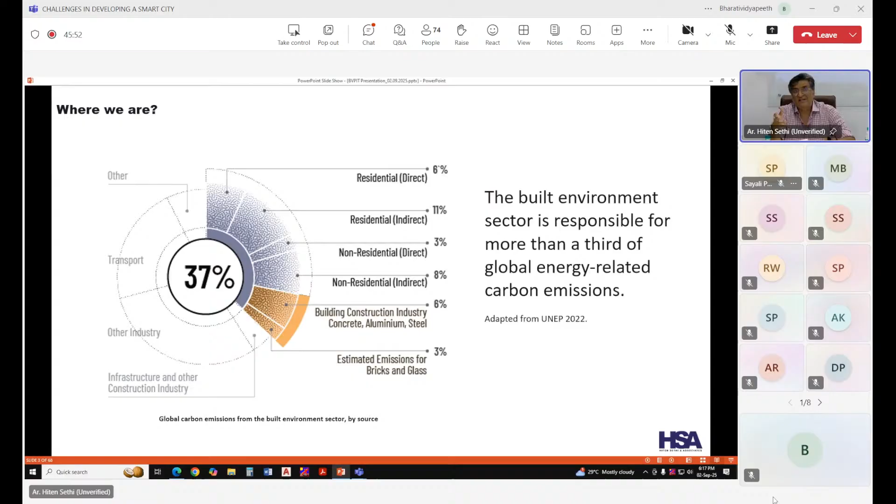Now, where are we heading with these kind of developments—I'll give you some very interesting figures. Urban development is set to triple in the first three decades of the century, the largest cityscape expansion in human history. By 2030, 6 out of every 10 people will live in the city.

This sprawl will swallow up a landmass nearly equivalent to the size of South Africa. The majority of predicted urban growth, 55%, is expected to occur in our own continent, Asia, including a 1800 kilometer east coast urban corridor in China plus 7 state capitals throughout India.

What is going to happen is it's going to consume biodiversity hotspots, leading to extinction of 139 amphibian, 41 mammalian, and 25 critically endangered bird species. And as we speak now, there must be at least a 10% decrease in these endangered species, because the data which I collected was way back from 2020.

By 2030, we'll need to produce 50% more food, energy, together with 30% more fresh water. When you see these figures, what you gather is the claustrophobic expansion which is going on. Anything we do today to mitigate these collateral damages is less—it's not going to be enough to get things to the right levels.

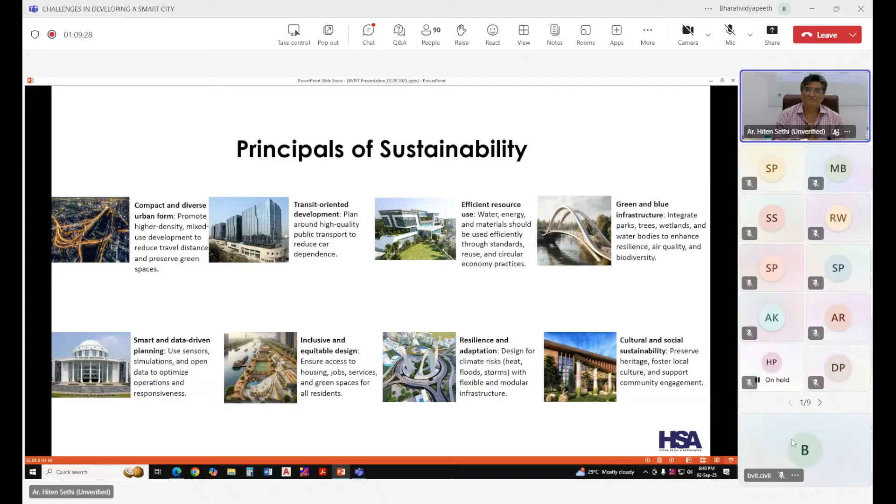What changed? From aesthetics, it became about how beautifully your building performs. So from looks and space planning, it became the performance of the built form. These two are two absolutely different partners going hand in hand nowadays.

You still need a very efficient building. We're talking about efficiency of buildings in residential, commercial, and all those things. We like beautiful buildings - see it in New Bombay, go to Hyderabad, go to Gurgaon, you see excellent kinds of construction coming up. Though at times they feel more European or westernized than Indian, they're aesthetically beautiful.

But a new trend started 15-20 years back when people realized that this is not the only thing - that I'm being very irresponsible to my neighborhood in terms of climate and use of my building. I'm not saving water, I'm not recycling water. The whole concept changed - let the building be called beautiful by its performance.

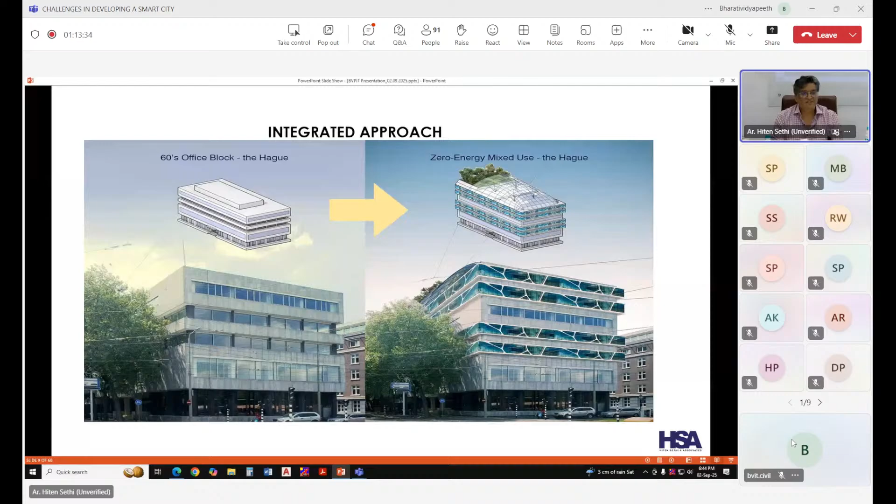So this is what happens now - everybody's talking to everybody. It's not about a building as a standalone building, it's about every concept of engineering coming together to make your building stand out in the field of sustainability. This is my future.

This is where I say my building becomes net positive. I'm not taking away from Mother Nature, I'm not taking away from the infrastructure corporation - I'm giving back to the corporation. Our IGBC headquarters, made about two decades back, was net zero at that time. Paryavaran Bhawan and Environment building in Delhi is net positive. They talk about solar covering, and how it encompasses the whole built form to achieve these things.

Your glass facades with lots of shades give you the same effect as cutting down glare and excess heat if used properly. Your ventilation still plays a very important role - cross ventilation in any kind of space. You have technology to back up your designs.

Your openable windows can be just adequately opened rather than spoiling the complete efficiency of air conditioning, in case the whole building is air conditioned now. Your storage tanks - chilled water storage or hot water storage - can be used, like in hospitality, using hot water recycled towards toilets and baths nowadays.

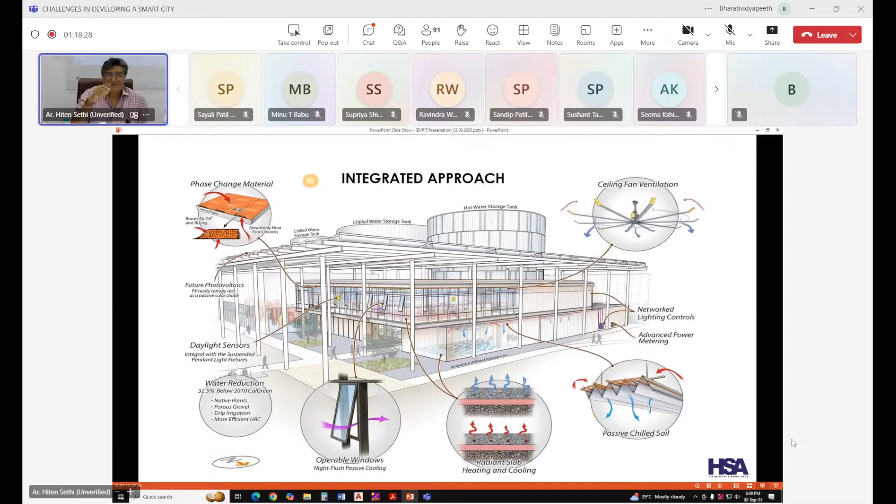So developments kept on happening. We started coming to prefabricated modular construction. There was flexibility, dynamic spaces, and so much of advancements happening. You keep on understanding how much buildings can go faster.

I remember recently we did for CIDCO a Pradhan Mantri Awas Yojana. We were the PMCs for that project, and we were able to do a ground plus 12 building in 96 days. Those are the kind of things which helped me to put technology first. So that means we went for precast, we went for zero wastage kind of policy while working.

So it was more of planning and less of execution, and that's where the world is going. Recently, about 4 months back, we did a ground plus 6 structure for CIDCO again, and that was done in 45 days, again precast. But these are post plinth, like after you come above the plinth. So those are the kind of new things which are focusing more on efficiency and flexibility. Adaptability and flexibility, I say, is the new keyword for the next generations to come.

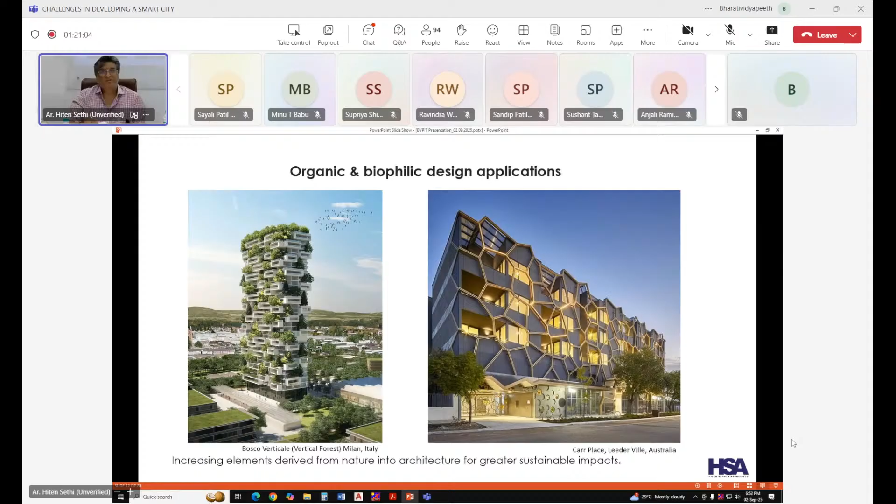Small elements, you see architects from time to time have been using. One is very simple: your step terraces in New Mumbai as earlier used to have it. All these step terraces were saleable, so for builders it was good, they used to sell them. But what did it indirectly do? It used to give you a space for having your plantations, greenery.

It gave you a space which acted as sun breakers to your windows, which increased the efficiencies and cut the glare for the inside light quality within the spaces. It also now gives you a lot of vertical spaces to have even solar roll-on panels which can be used for individual flats. So you don't wait for someone else to come and do it for you. This is your house, you can do it for yourself.

Many new design concepts came in where new swimming pools were introduced. We're doing one project in Rajkot on a similar thing - recycled water being used again and again. The idea of swimming pool was leisure, but when we worked on the water balance of the whole building, we realized we could use this additional water instead of throwing it to our drains. I didn't have space at ground level for a large pond or enough rainwater harvesting capacity, but we created swimming pools at every floor.

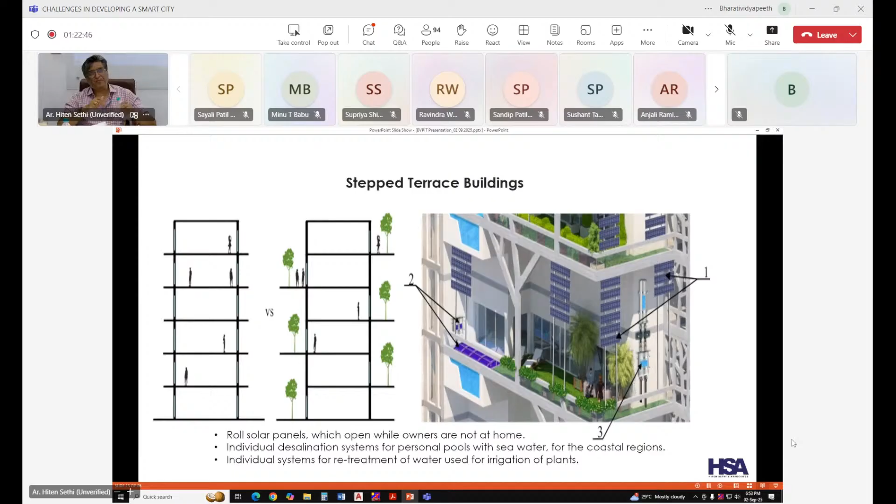Then the roof gardens, like the Jade Garden at Worli Science Center - that was initially constructed in the 80s by Mr. Kadri, and that was the first time we saw a terrace garden at such a huge institutional site, and that also in a place like Bombay. So many things started, and built forms started looking at that particular thing.

Each and every element started asking for inputs from visualizers to be a responsible part of the built environment. So whatever we do now in roofs or gardens or other things, it comes with a purpose and a very robust concept, well integrated into the whole complex.

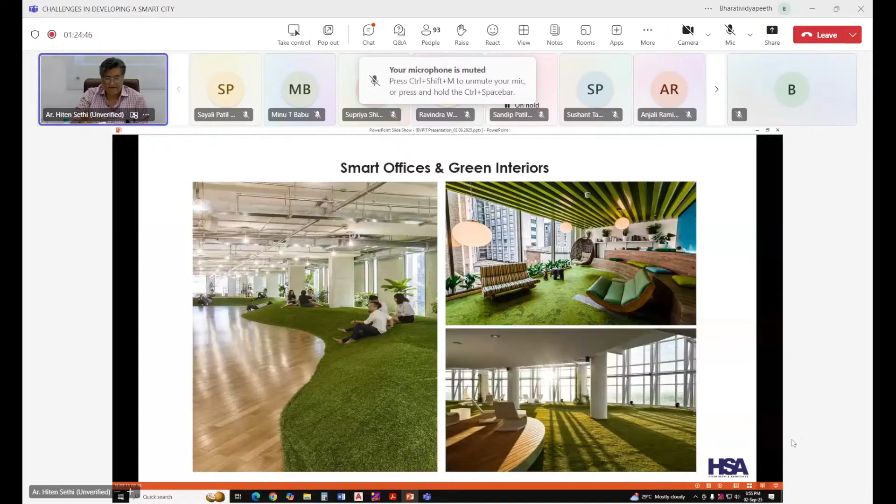These are what the future is bringing us together - offices are bringing nature inside, there are lots of leisure spaces, many informal spaces which you see in a lot of IT companies integrating. Anything which stimulates the human senses, which stimulates the whole working environment - I think that's where the main focus is of everybody. Those are the kind of things which can move us in the right direction.

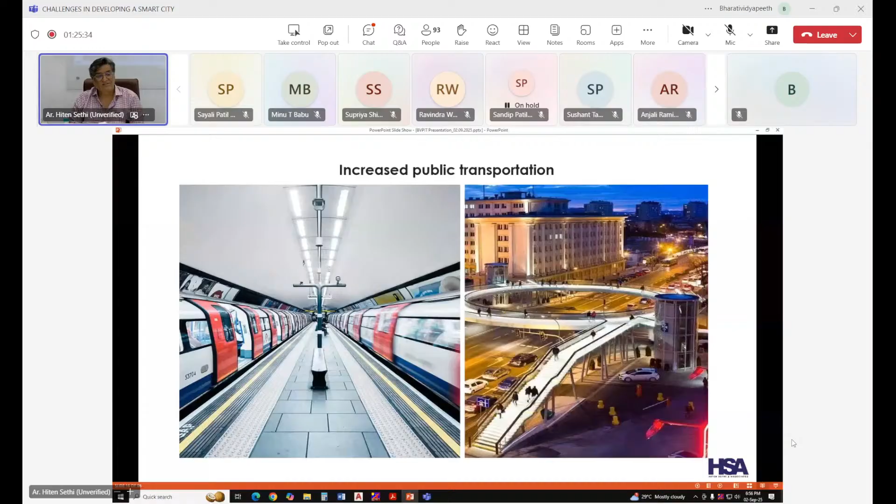Public transport - you cannot have cars everywhere, or you lose out on walking space, breathing space, and your space. You can't lose these three factors at any given time. So the best solution is a robust, increased public transportation system. London has tubes, we started a metro. Unfortunately, our population increase is comparatively much higher than the infrastructure being introduced in public forums, so it gets absorbed so early that it's not noticeable. But yeah, we're doing a good job.

I think the infrastructure over time has been fantastically integrated into our brownfield cities, but enough is less given the population growth we have. The only thing I see is that we really need increased public transportation, more built forms, and more government-level interventions to give these facilities to people, so people get their own space in the city.

Again, sustainable designs - many concepts are happening, like bamboo nest towers which are going to be ready by 2050. It was a concept where designers wanted to create a sustainable environment - tunnels created with energy generators, wind tunnels created at different levels, complete bamboo roofing. The architect wanted it to be like a forest, the vertical city to be part of a forest, so he covered the whole thing with the bamboo nest, and biophilic design follows at different levels and places. It traps wind energy through these wind tunnels, keeping the whole environment workable and usable, and actually invites more birds and habitats to be part of this built environment.

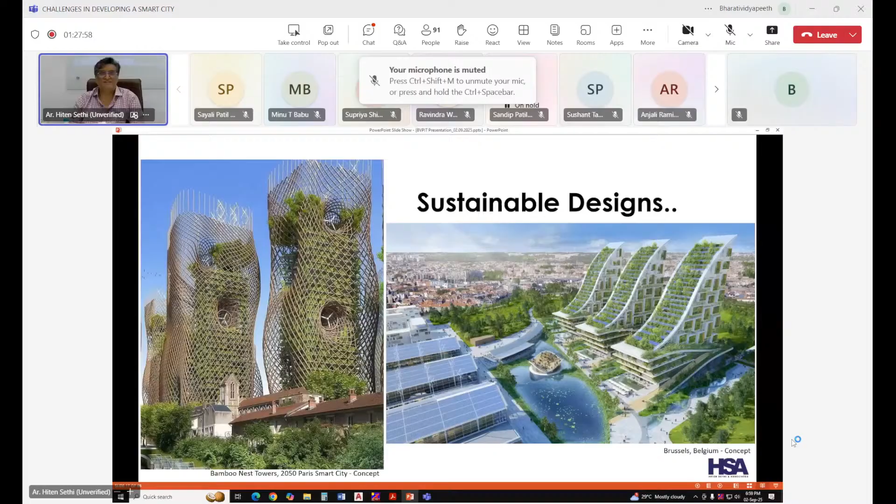So different kinds of concepts worldwide - people are experimenting and putting things, doing their part of the job.

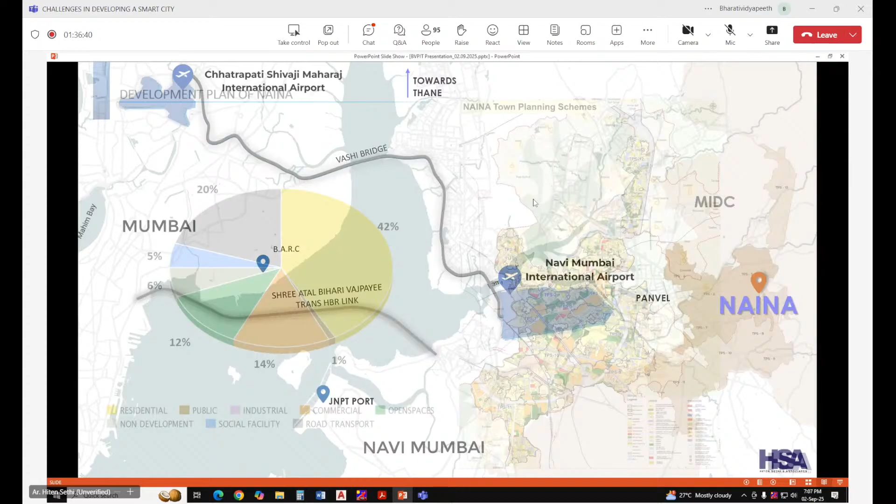So it has a very interesting DP sheet, and by looks of it, it looks like a Rangoli diagram, as I always say - yellow, green, orange. When we read the GDCR, we used to find it funny what the spaces are, what is growth sector, and what are these things. But we realized there was a logic when the plan was made - it had 42% of residential area.

A very robust transportation system, 20% was already allotted. Then commercial space at 14%, non-development which had rivers and unworkable mountains, hill slopes, were there at 6%, which is very high. Green spaces we left at 12%. So we knew that 12%, 6, by 18% we're going to have it open, and then for 20% I'm giving a road anyway, so it's going to be 38% open spaces. This was like public and industrial - so there's no industrial here, so public and social facilities put together.

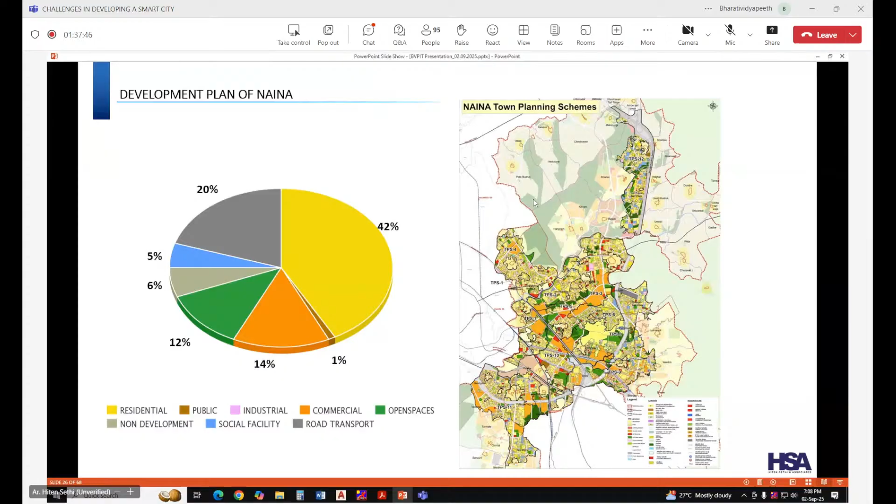So what were the objectives which we thought will make it future ready, which will serve our next generations to come? We've seen the development of Mumbai from 1971 to 2025. We're talking about something starting in 2025, and I'm sure it will go for another 50 years, so we're talking about 2075. So what are the basic principles we integrated?

We did some tweaking in the whole DP, where the focus was very clear that we wanted to give future-proof planning. We also wanted, with the kind of surge of tech and everything happening, to facilitate speedy development of economy so that before they go to Hyderabad or Bangalore or Delhi or Pune, they should first come to New Bombay. That's the kind of readiness we require in terms of infrastructure and sustainable ecosystem. And as I was talking earlier about inclusiveness, you need to create an environment which boosts mental, physical, and social well-being of the users and citizens.

So we had a very simple strategy - we wanted to assess the present and future demand, assess the feasibility of resources and proposed development. Very simply, when the project was conceived, as per the GDCRs at that time, the FSI was 1. Today, in 2025, the adjoining area half a kilometer away, under UDCPR, is giving FSI from 4 to 9. So what should be my readiness for this project? The whole concept goes for a toss. So we thought, let's assess what is designed presently and what can be the future demand, then create an incremental roadmap.

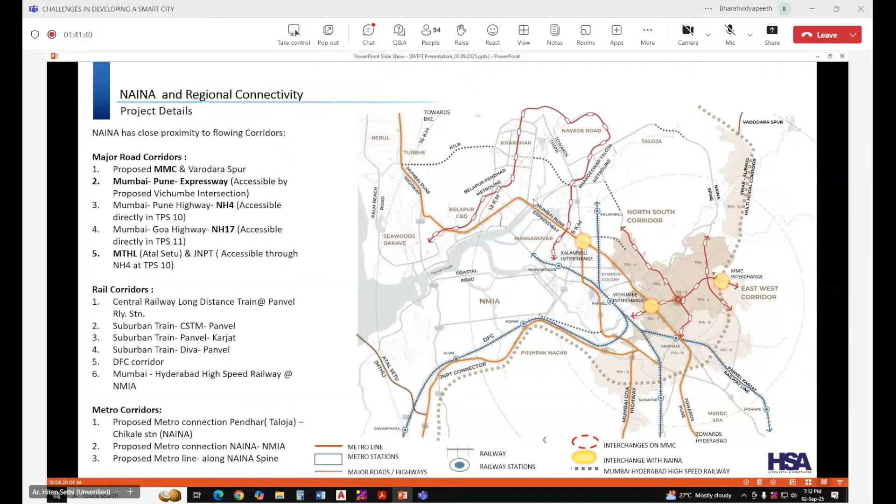We have multimodal corridors from 100 meters coming in, dedicated freight corridors coming in, JNPT connectors, airports - so many dynamic spaces in and around. How do you put this together so that I can reach everywhere in 15 minutes?

So what other things can we add to make the city more robust and more acceptable to people with different strategies.

Make iconic landmarks in terms of urban form. Choose those urban forms which become the city centers of that particular project - they should not be on the side of the road, they should be the focal point of the road. So give better space for living where the city gets its identity and branding.

Every TPS can have its own identity, it can have its own existence. Natural resources which are available can be taken as an opportunity to create a full leisure recreational space for people, like in Paris - next to the river you can have promenades developed. We had an opportunity of doing the same thing in Gadhi River.

Similarly, to be resilient and accommodate more population in coming time, do thorough flood mitigation measures right now - assess what effects population growth is going to have, and activate strategies to redefine the river fronts in terms of depth and quantity of discharge or water they'll carry in the future, because finally the whole city's stormwater merges into these endpoints, back to the creek, back to the ocean.

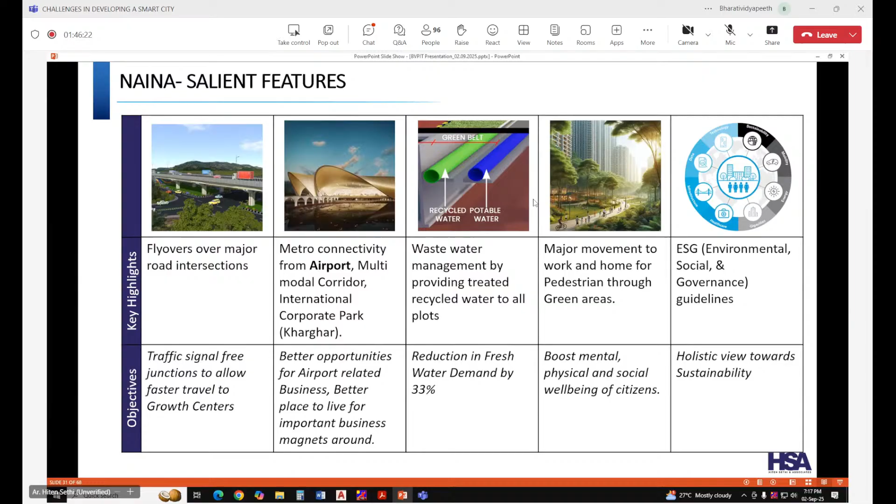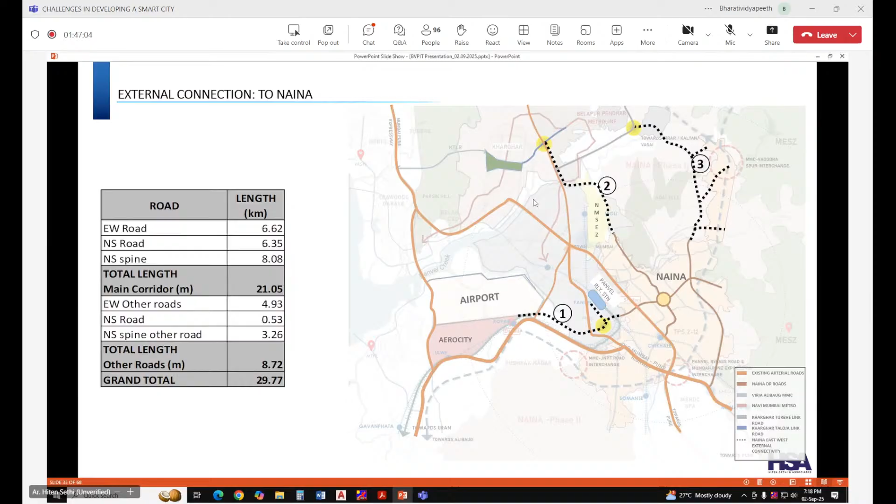This helped me define that from MIDC Mahape area, my travel time to this particular area reduces from 50 minutes to 18 minutes. From Belapur, it reduced from 28 to 13 minutes. Taloja MIDC from 26 minutes to 15 minutes, MTHL from 35 minutes to 17 minutes, and Rasayani Padalganga to 20 minutes. So imagine the whole city becomes 15 minutes connected. Don't you think that itself is a big feature which would improve development and talk about sustainability in the loudest of words?

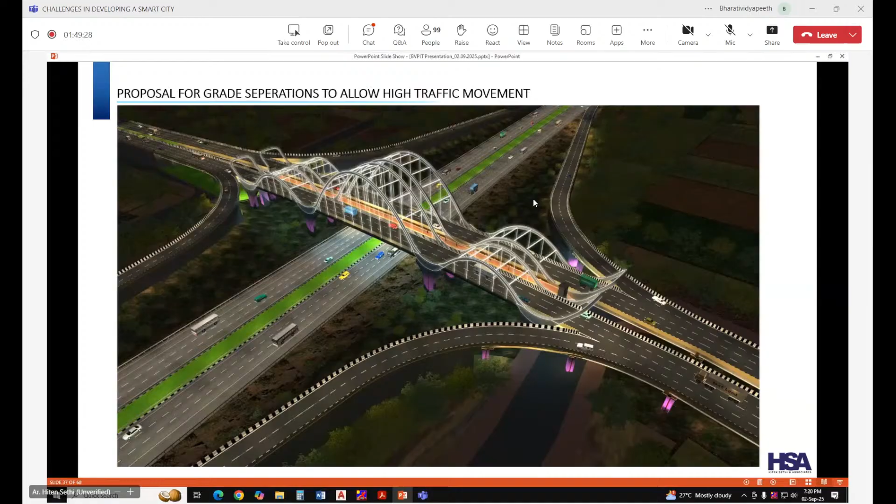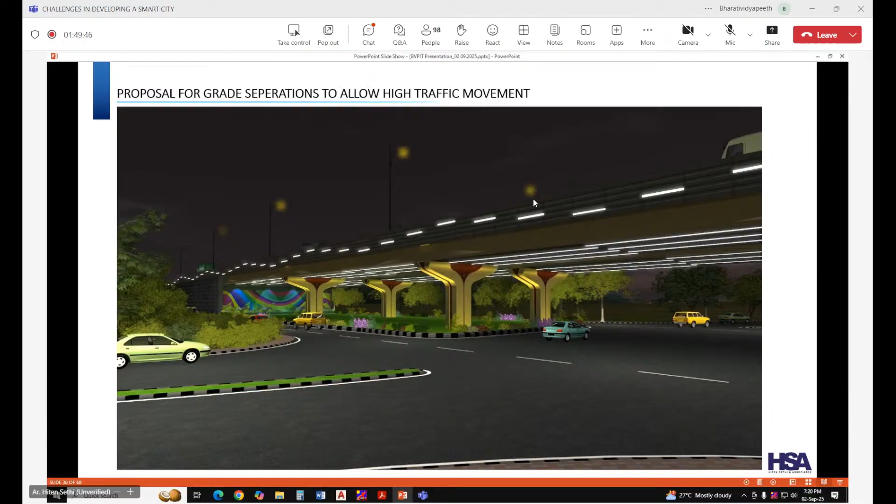The grade separations for people movement involve social cultural interventions where all the negative spaces or white spaces which get created here get used in some way or the other. Over the Gadhi River, you have these kinds of structures going in, so how you can make it more interesting - that's the kind of interventions we're designing right now.

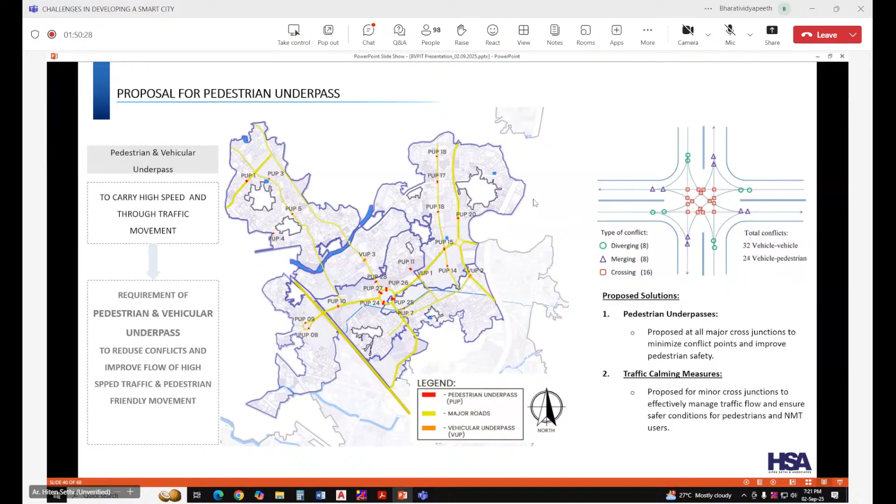As I told you, we have created lots of pedestrian underpasses. So at any given time, if my child has to go from school to home, he doesn't have to cross through this - we've created pedestrian underpasses. We've also created some junctions we call traffic calming measures at the upper grade level, where minor cross junctions effectively manage traffic flow and ensure safe conditions where we're not able to cross it over. Lots of underpasses like this again become social places for people to move in.

For road junctions, we graded the levels of the particular roads - service roads and main highways - for safety. We've used the sections for services together, and as you see, the main roads don't have walkways. The walkways and footpaths are on the service roads, which cater to the residential areas. So there's a free pass of vehicles on the main spinal roads.

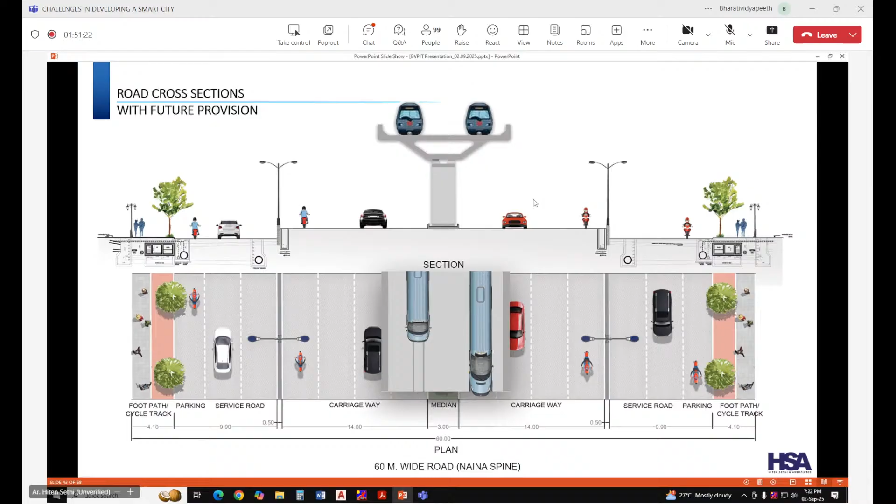Future provisions we kept right now, so that whenever the metro has to come, things don't go for a toss. We've kept medians in such a way that traffic is not affected the way it is now, because no services get affected. It's just that you barricade one side and start precasting in the coming time to accommodate future needs.

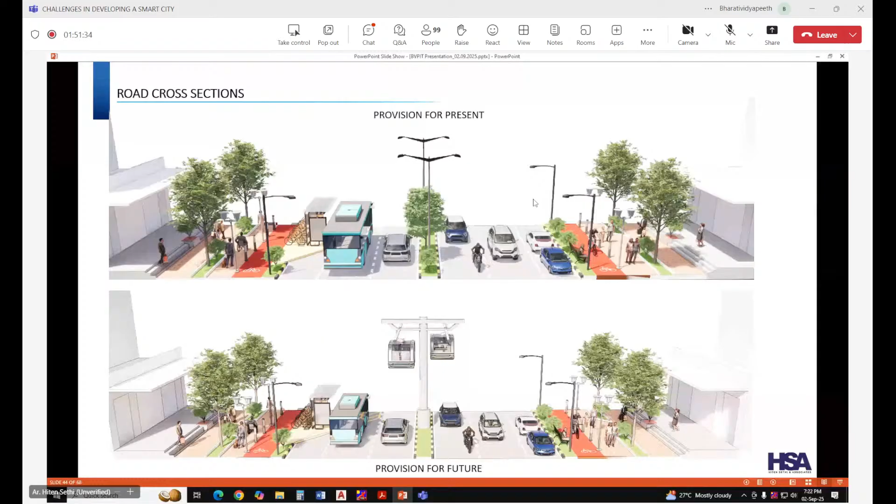Couple of sketches. Air buses which we've created, junction points, all the typical details, urban design of each and everything that the city is merged into a very interesting kind of detailing, which moves from one thing to another.

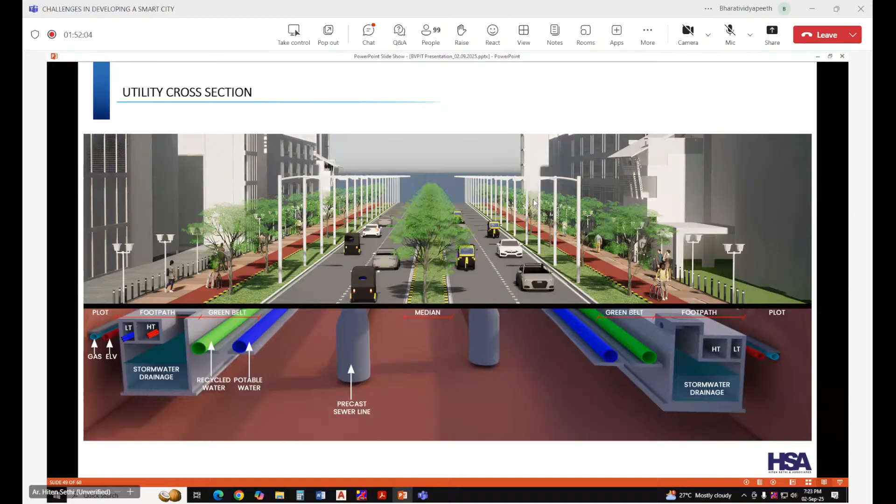I go to urban and we worked out utility cross sections next. So this is how we have created the city level now. These are all precast stormwater drains. So effectively, I'll tell you a very interesting thing.

Like we had the Gadhi River, which is very good for now, but 30 years from now, we didn't know that the capacity needs to be increased perhaps for all the water bodies which are available. So what we did was we took a technology which we were...

working with all the LT and HT. Generally, what you see there, they're very separately put services. So we integrated the whole thing in a particular way that we were able to save 40% of space and reduce 2 meters of height depth of excavation with this kind of tech. So the cascading effect is that your excavation at one point is reduced, less concrete and less materials are used for the same kind of construction.

When it goes to the river, the final river, there is minimum intervention required at Mother Earth's level where you have to change the course or increase the depths to beyond 4 meters or something. So we were able to do it in 1.5 meters only, and so on and so forth.

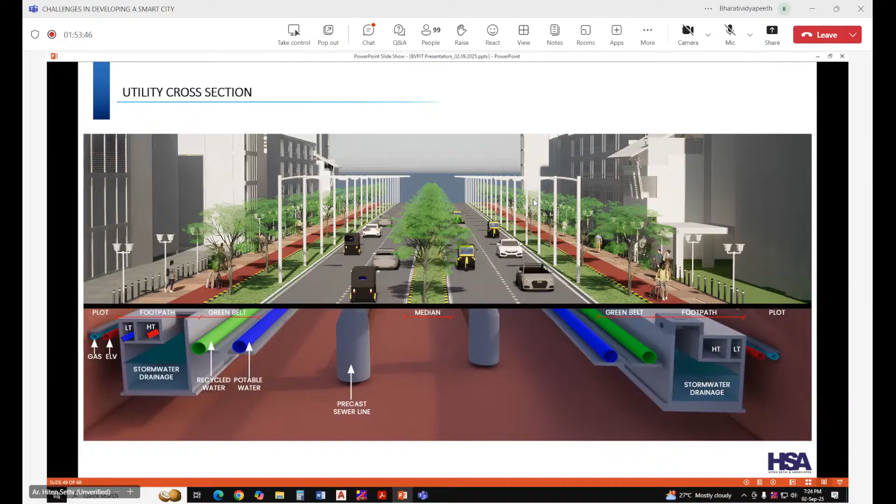So these kind of things have a very huge effect on literally every part of a particular city because water levels are fixed. We have blue lines and red lines, we are predefined. So we know when the flood risk is, we should not have another 26/7 like what happened there during flooding time. The same thing can be avoided by using smarter technology in and around. Next.

So that's the kind of sections which we created. And now each and every detail I'm showing you is part of my sustainable interventions when we are designing a particular city. Same space, same number of meters, and same things which move together. Next.

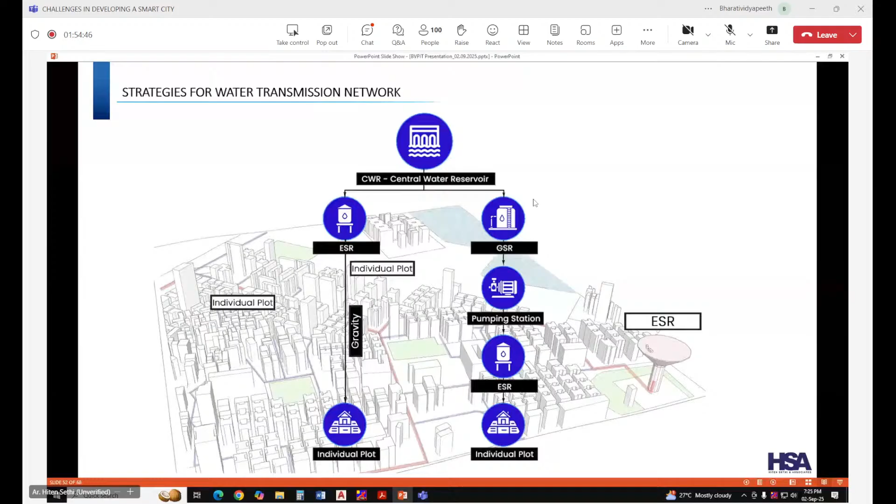So then we also worked out a strategy. As I told you, a lot of energy goes in distributing water. So we tried to work out how the ESR can be created and GSRs put in so that we have minimal pumping required for these particular plots. I think 80% of the efficiency we receive by natural gravity, and we're working on certain terrain plots which get available to us where we have to put the pumps, and that's where the reverse slopes are coming. Those are the minimum points where we have to add and be dependent on the similar kind of thing. Next.

Similarly, water transmission network, minimum kind of things. So we call it water management. What we're trying to do is we have already started a dam work called Kondhane Dam, phase 1 is 250 MLD. So water supply is about... so when we are actually working on the whole system together.

Similarly, we've created a feeder main, one single, which is around 45 kilometers. It's a huge endeavor which we're carrying right now, adding to this particular water management. So next.

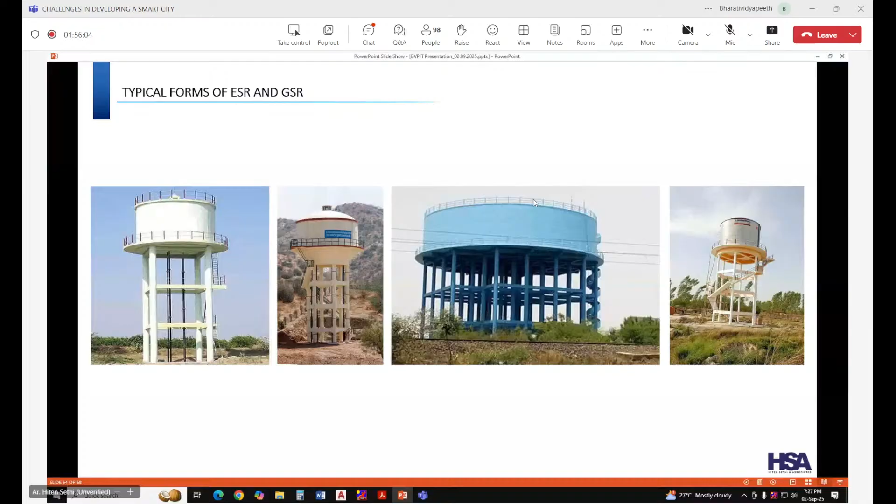Then we started talking about why even waste the space of what we create in terms of ESR. This is what you've already seen in the city. So we are contemplating a new creative approach towards it. Can we make it a project which becomes biophilic by itself, with horizontal greenery and vertical greenery in and around? So it creates an environment for people to be inside, and inside can be used for people to use.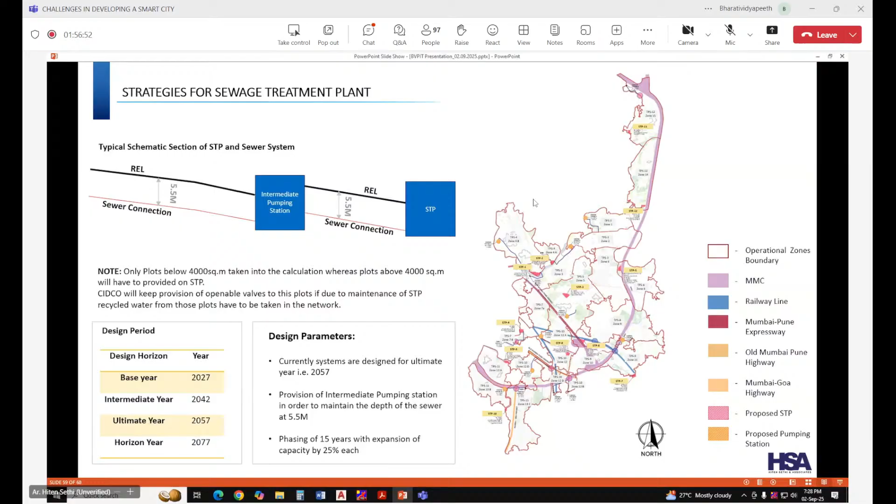Similarly, STPs, all the water can be recycled. The phase 1 what we are designing is till 2057. At least we can cater to the requirement of whatever STPs we are creating. Next.

Then green features at site levels, at building levels, at infra levels, we have lots of detention ponds, swales, and permeable pavers, which we are adding into our green corridors.

Total length of the network, we're still working on it. But the principle we found is we can have 30% concrete and 70% can be green bioswales.

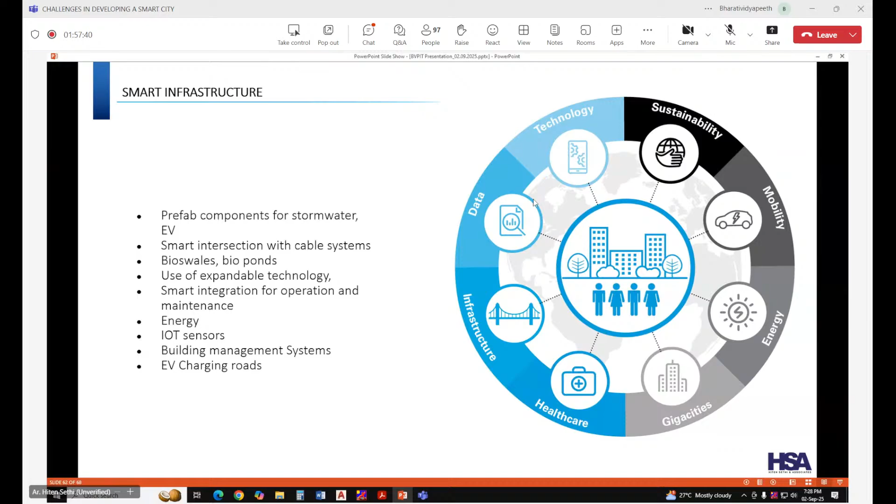Similarly, when we come to smart infrastructure, we're adding lots of prefab components of stormwater, smart intersections with cable systems, bioswales, IoT sensors, energy BMSs, EV charging roads, and all these things integrated into one system.

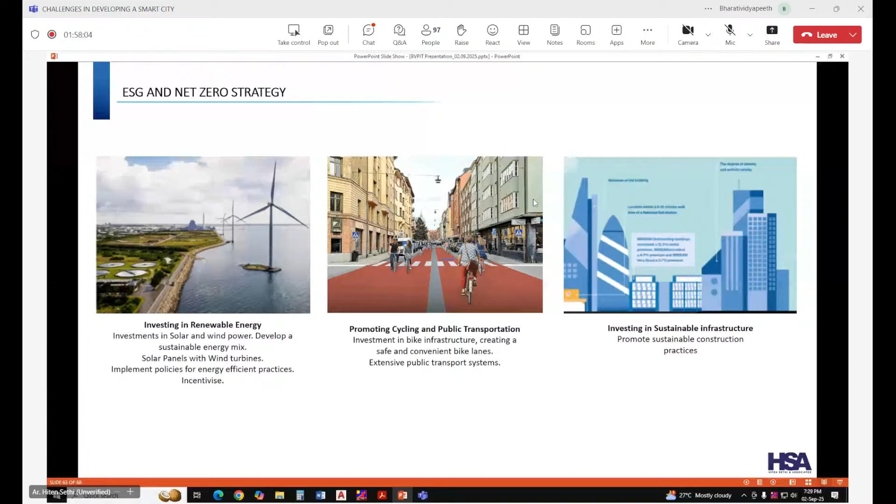As an ESG strategy and net zero strategy, we're investing a lot in renewable energy, promoting cycling and public transportation, and creating a solid waste management system as robust as Denmark's Copenhagen system, by investing well in sustainable infrastructure and promoting sustainable construction practices.

Next, the waste circular economy approach. All these particular things integrate well, putting things together.

Solid waste management is also being taken care of right from day one, so all the city streets are being designed accordingly. In fact, in a small portion, we are even trying to work out a pneumatic system for a smart underground collection system in a small patch to see how it works.

As I told you, Copenhagen fantastically treats 440,000 tons of waste in terms of electricity, generating 7 to 9 megawatts, similar to a Dubai waste-to-energy plant. I think our MD was recently in Copenhagen to see this plant, and we are all inspired to include something like this as part of a PPP happening in our city.

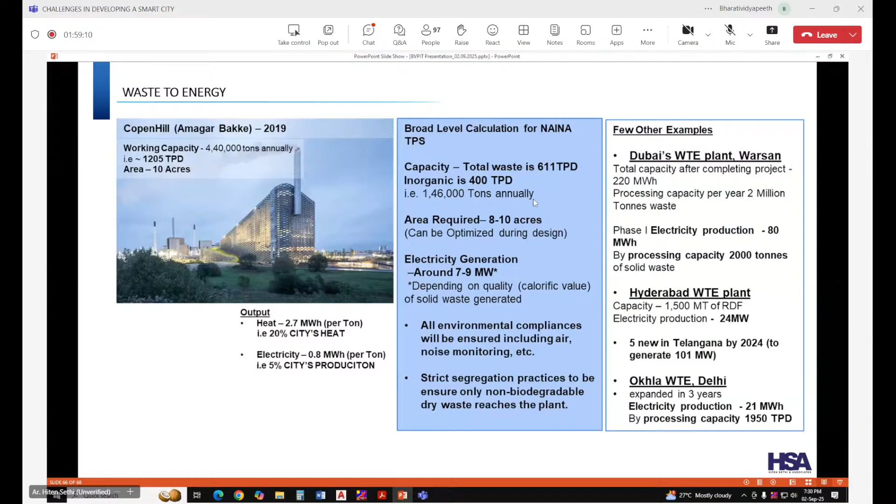So finally, my friends, let's agree with what the Dalai Lama said: human use, population, and technology have reached a stage where Mother Earth will no longer accept our presence with silence. So let's work hard towards a very sustainable future and be proud of what we create. Thank you.

Hello, everyone. Today, my topic is on concrete mix design and how it is applicable for our smart city. Before going for what is actually mix design and all, let's understand first what is concrete.

Nowadays we know there are a lot of materials available in our market for which we can go for low strength concrete.

Basically, in our syllabus, we know that concrete is a mixture of aggregate, cement, sand, water, and admixtures. But I have one question: if some of the elements are eliminated from our concrete, suppose we eliminate the coarse aggregate, can we define it as concrete?

Most people say when we eliminate the aggregate from our concrete, we can't define it as concrete. We can define it as mortar, but not as concrete, because as we go for high strength concrete, we mostly eliminate the 20mm aggregates or coarse aggregates, or sometimes we have to replace the aggregates with another material to have high performance concrete. So the definition of actual concrete changes.

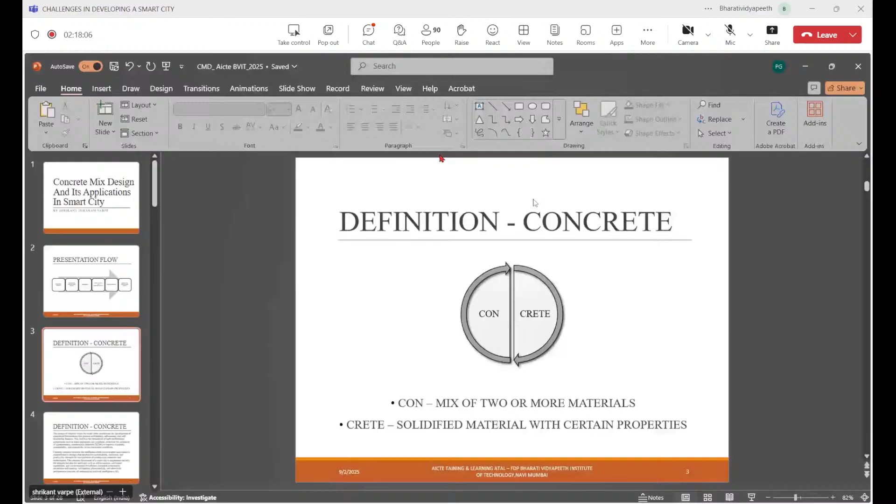So if we see, there are a lot of concrete mix design types: there is the IS type, there is DOE, there is the Department of Environmental Method, and RRL, that is the Road Research Laboratory.

Before going for actual mix design, there are a few changes which have been done in our Indian standards, and it is very important to understand them. So what are the major changes made considering the latest environmental or exposure conditions, or the ongoing constructions in the country? There have been a lot of changes done in IS codes.

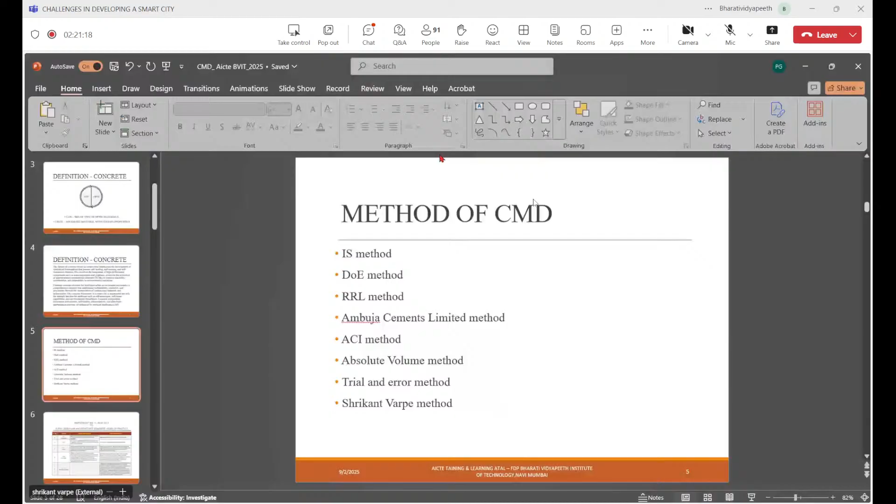During mix design, it was mentioned that seawater is not at all recommended as it is harmful to our system. The same has been mentioned now. The only difference is that now we can use it for curing purposes for plain concrete. Earlier it was not mentioned whether we could use it for curing or not, but now this can be used unless it is under specified conditions.

The major change introduced in our IS code 456 is regarding admixtures. There was no clause regarding whether admixture should be reused or redosed. Now this clause has been introduced, where an admixture can be redosed only under special circumstances - the supplier, vendor, or whoever is providing the concrete should have a mutual understanding that this redosing can be used, and it should not hamper the quality of our concrete, unless both the purchaser and the supplier or producer have mutual understanding regarding the redosing.

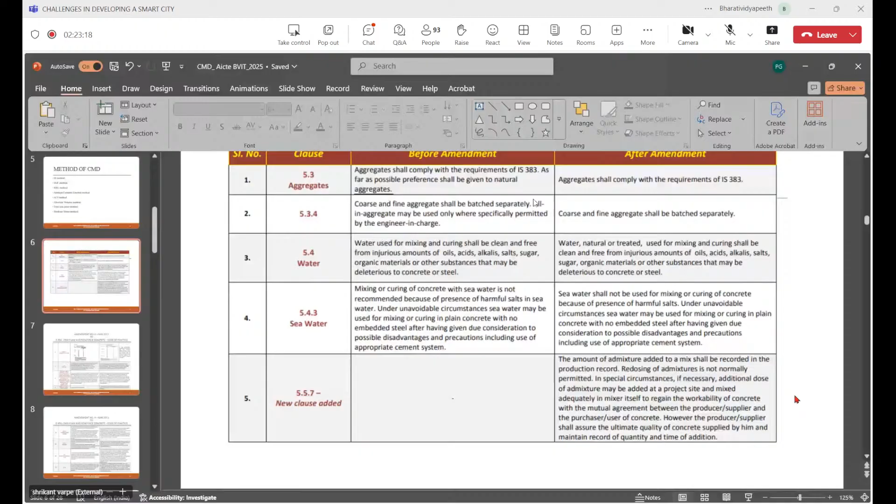Now, the grade of concrete has been a major change in our IS code. Earlier it was around M80 only for the grade of concrete - in table number 2, it was only up to M80. And now it has been changed up to M100. Earlier, it was, you can see...

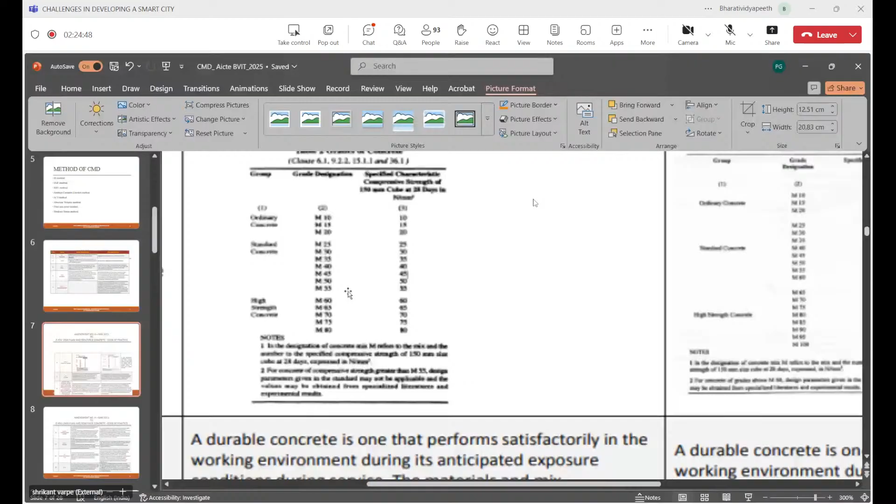I will make it larger, or I will share the photo. You can see that earlier there were only 3 types of grades mentioned - ordinary concrete, standard concrete, and high strength concrete. The difference was, earlier the grade of concrete for standard concrete was mentioned up to M55, which has now been changed. For standard concrete, we are now considering the maximum grade of concrete as M60. The high strength concrete earlier we used to consider up to M80 only, but now we are considering high strength concrete up to M100. That's the major difference in grade of concrete that has been mentioned.

There is no change in general clause 8.1, but there is a slight change in table number 5, note number 3 - the minimum cement content, maximum water cement ratio, and grade of concrete has been individually referred for all types of exposures.

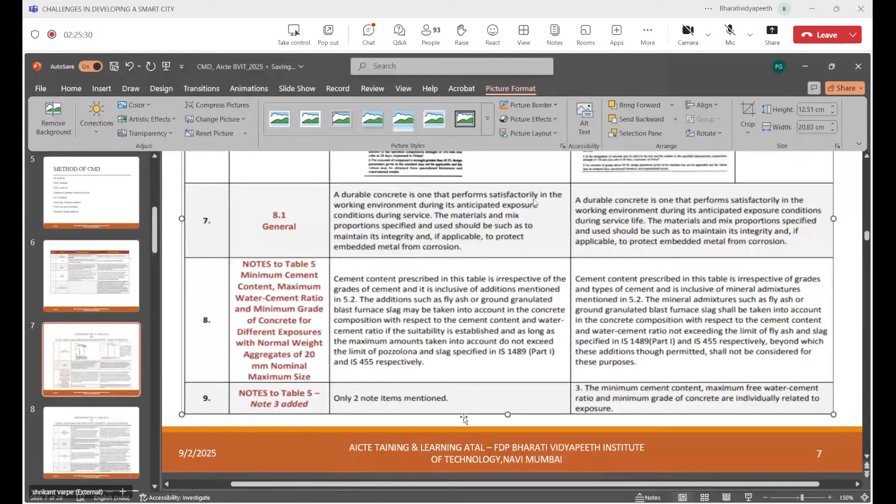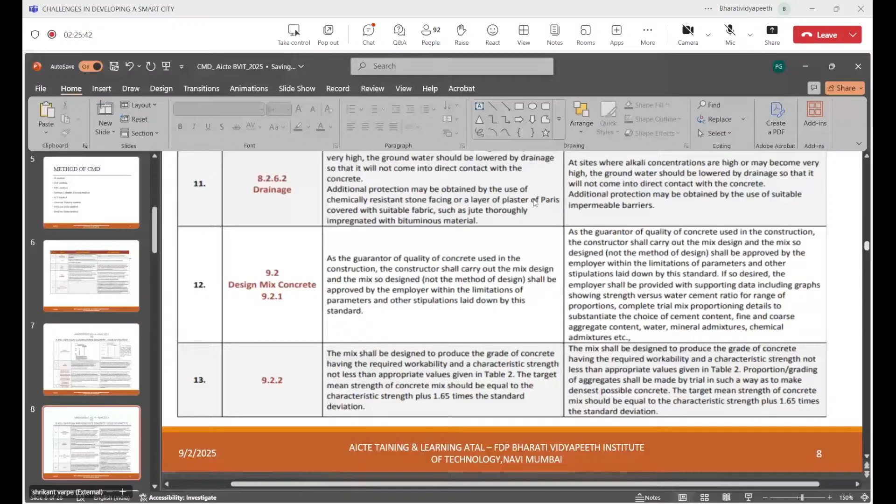This has been a major change in our mix design. Why am I showing all these things? Because if we don't understand the basics of what changes have been made, there are possibilities of not having a sustainable or cost-effective concrete. Concrete mix design is again a cost benefit exercise with proper quality of concrete and the specification which we require.

Clause 8.2.5.4 deals with alkali aggregate reaction. Earlier there was no major change around Na2O; total alkali content should be around 0.6%. But the change is for the use of fly ash. Earlier fly ash had to be at least 20%, which has now been changed to at least 25%. Slag remains the same, at least a minimum of 50% can be used. This was a major change.

Secondly, regarding drainage, which is not directly related but is in the clause - earlier it mentioned suitable covering of the drainage or lowering the drainage in contact with alkali concentrated soil or site. But now it is mentioned that we can use suitable impermeable barriers.

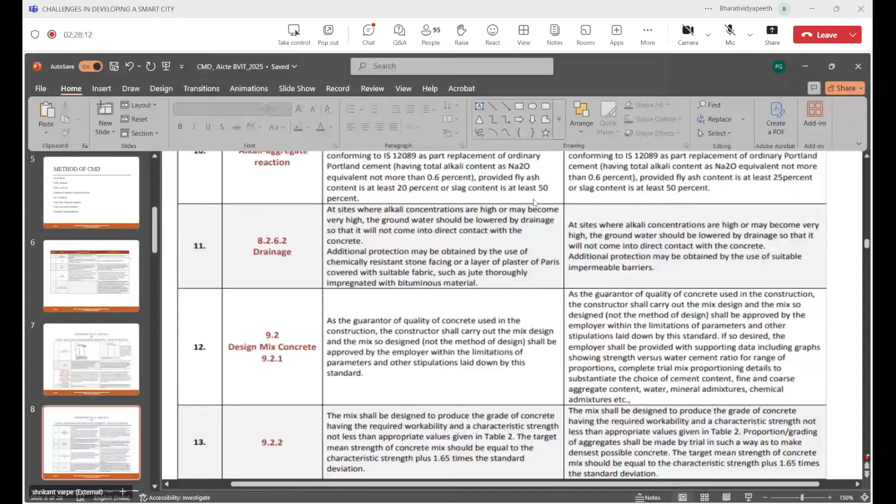As mentioned, the method is not important; what's important is what we get out of it. Whatever design we get, it should be proper as per the specification. We should achieve the properties of concrete. But now there's a slight change in this content.

Whoever is preparing the concrete mix design - if someone asks for the relative values and where he is getting the values from, then that person has to implement or introduce the graph shown, using the cement content, fine aggregate and coarse aggregate content, as well as the mineral admixture percentage he has selected, and the criteria for selecting the chemical admixture. Earlier you could just submit the mix design with proper values, but now if someone demands graphs or proper tables, these have to be implemented or introduced in our mix designs.

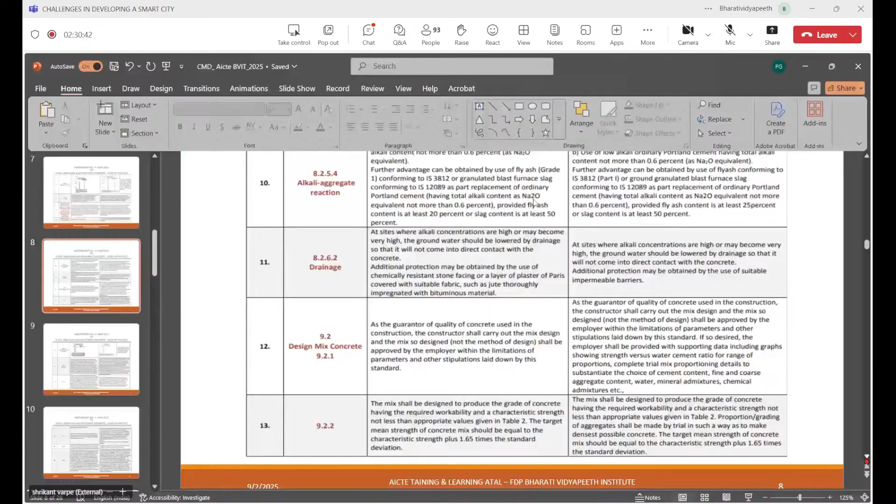As I mentioned earlier, for standard concrete the grade was up to M55, and now in our new amendment it has been increased up to M60. So there is a standard deviation which has been introduced for M60, which has changed from the earlier to the recent mix IS code.

Now, the batching system has not changed much. Only thing is that larger concrete plants having automatic batching and mixing plants should be properly calibrated and should not have differences between the values mentioned in IS 4926, which is the IS code for ready mix concrete mix design.

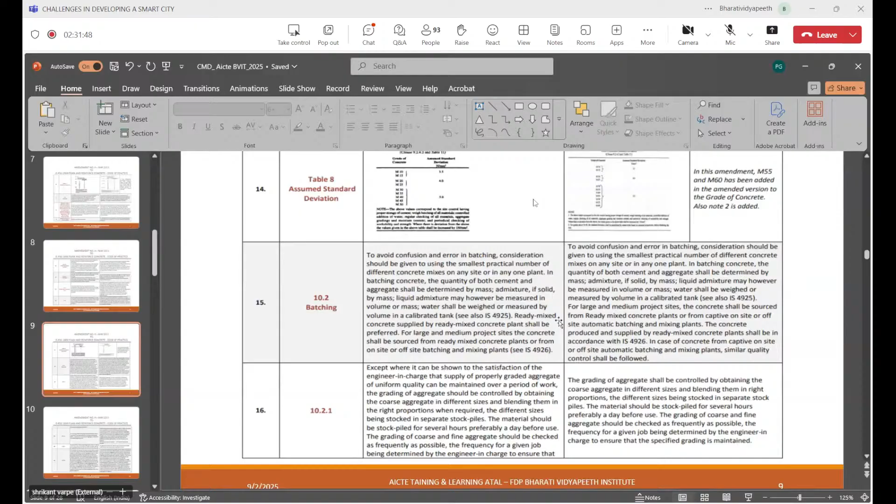There are a lot of changes that I'm not going through all of; I will just mention the ones which are more relevant or more effective for our mix design.

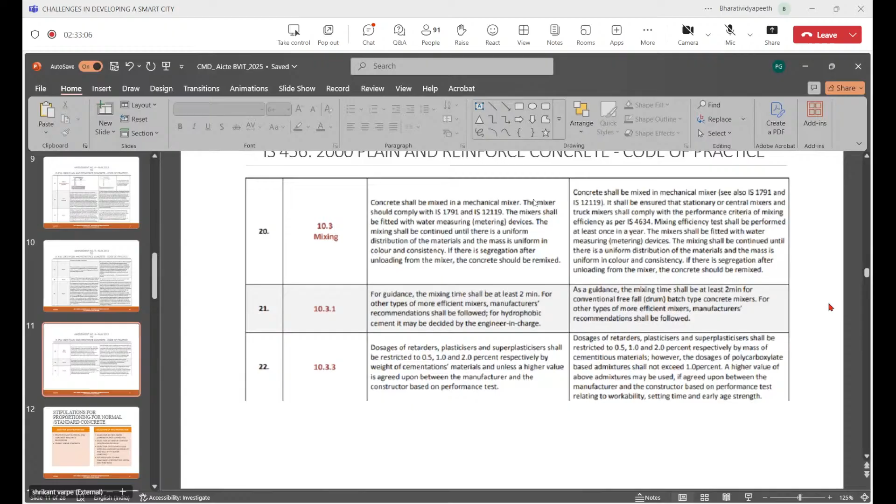Now we will go for the steps involved in our concrete mix design. It is similar to our earlier mix design, but a few revisions should be done. That's why I've added this slide.

Before going for any mix design, we need to know the properties of our material available at site, and also the requirements from the client, that is what strength is required, what workability is required, and then we will go for the steps involved in our mix design.

First we will find out the water cement ratio with respect to strength and durability. Then we will find out the water content according to our MAS, that is the maximum aggregate size. Then we will select our cementitious material, whether we are going for fly ash content, GGBS, triple blend, or a microfine material like alcofine or microsilica. We will select it accordingly, decide a percentage replacement for the OPC, and arrive at the final amount of cementitious material. As we have our water content and water cement ratio, we can find out the cementitious quantity.

Then after finding out the cementitious quantity, we will go for estimating our coarse aggregate proportions, with respect to zone, maximum aggregate size, and water cement ratio. This was the normal concrete mix design. I will show it to you later on, explained with an Excel sheet.

Now, before going for self-compacting concrete, why I mention SCC is because nowadays a high performance concrete with high slump ultimately transfers to self-compacting concrete. We can say self-compacting is a high workability concrete, but it's not necessary that high workability concrete should have high strength also. But when there is high strength involved with high workability, it has to be SCC.

So if we go for SCC, we are not going for normal slump concrete, we have to go for flow. It is important to understand the specification, or the classification of flow concrete. It is mentioned that classes are SF1, SF2, and SF3.

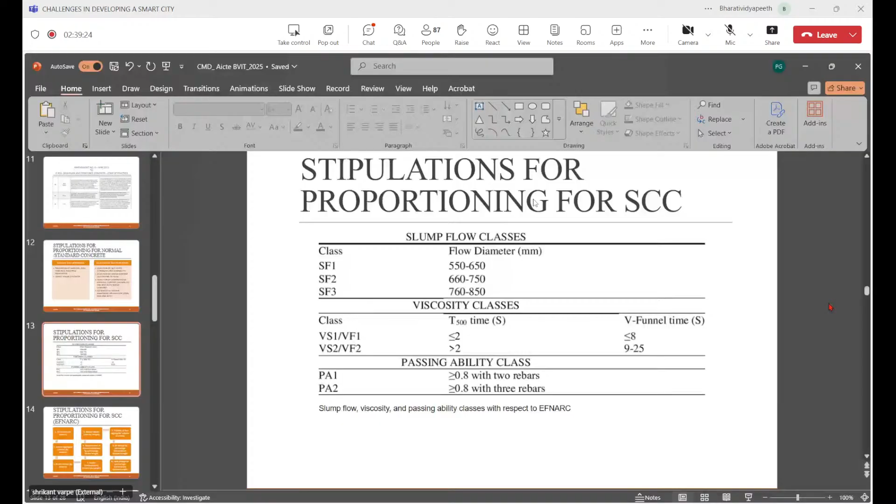Earlier this was from EFNARC, that is a mixed design method we used to conduct before we had the IS method in our IS code. Earlier we used to follow the EFNARC steps.

Now we also have Indian Standard for our mixed design. But before going for Indian standard, what were the steps involved in EFNARC: first we used to take the air content by volume, then find out the coarse aggregate volume, then we go for the paste content.

After having the paste content, this paste content depends upon the binder and the water. So we find out how much binder or cementitious material by weight should be there. After it, we have a mineral admixture - if we go for any replacement, what should be the percentage of it. And then we find out the water to binder ratio.

Now the difference, in our language we can say from EFNARC to Indian standard, I will explain later on. Then we find out the volume of fine aggregate with respect to volume of mortar. Then we have the SP dosage, that is the admixture dosage percentage with respect to the cementitious material. And finally we find out how much VMA we are going to introduce in our concrete.

Now for Indian standard, the basic things which are changed are only the flow and the classification of flow and the viscosity. Rest, you can say the mixed design process is almost the same. The only difference is in our maximum size aggregate and the air content, which is mentioned in our table.

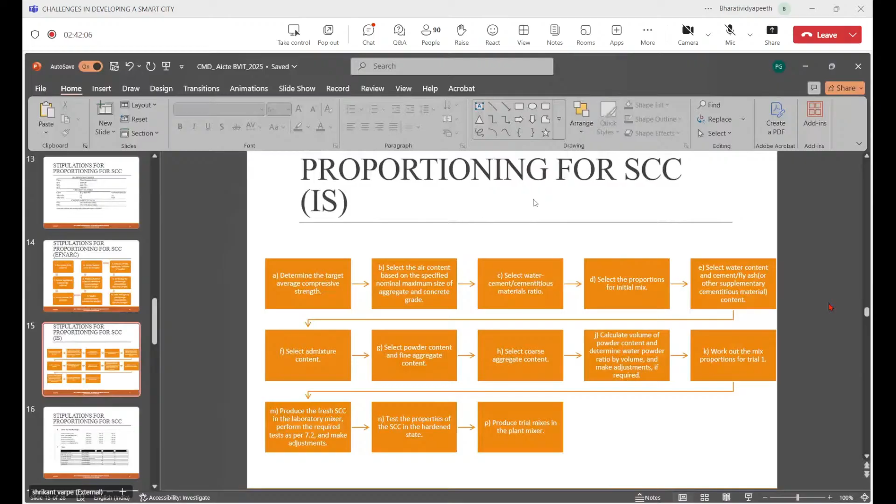Now these are the specifications, or we can say the limitations, which is mentioned in EFNARC, which has already been taken in our mixed design also in our IS code.

These are the requirements or limitations for the materials. But for testing also, they have mentioned certain requirements. Now you can see there is a table I have mentioned where the instrument, or which test is going to represent what property of that self-compacting concrete.

Like if we want to find out the filling ability of our concrete, we can go for slump flow, we can go for V funnel - we can use these two tests. If we want to find out the segregation of our concrete, we can use it, that is V funnel. If we want to find out the passing ability, that is passing through all the reinforcement, through all the congested area, then we have to go for an instrument like L box, U box, or fill box.

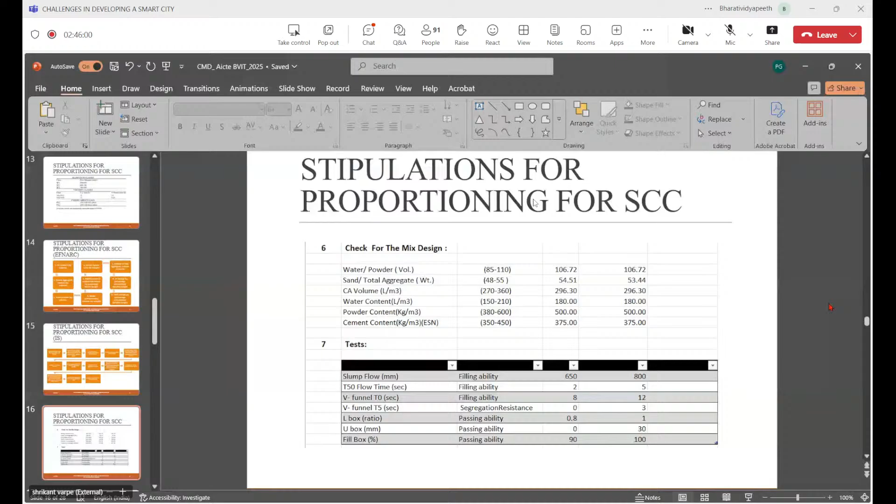Now these are the basic things which most of the people or most of our seniors are having confusion about, or not fully concentrating, because of which there are a lot of differences.

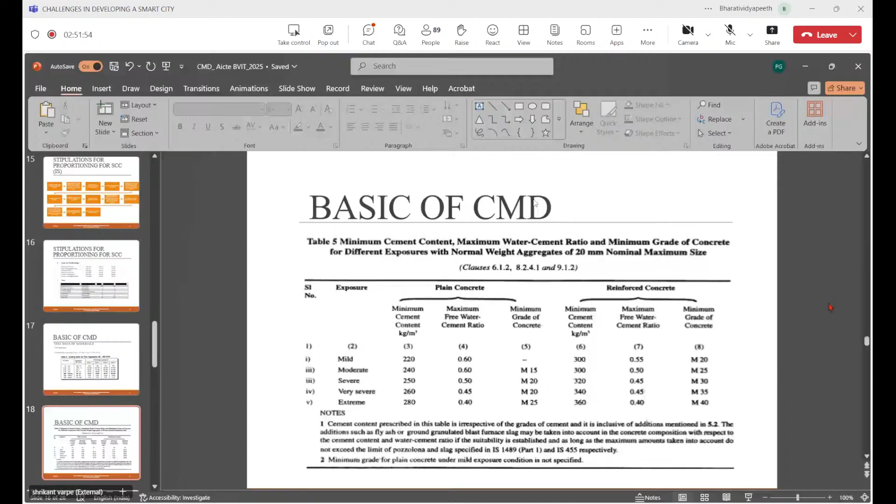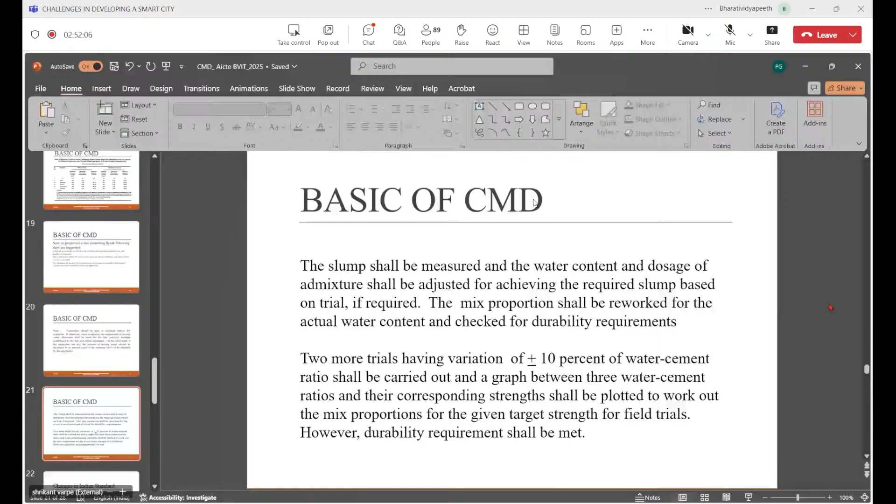I will show it to you later on. These are the few basics of how we are changing our replacement of cementitious material or change in our water cement ratio. I'm not going through this.

Now these are the few mix designs which have now been changed or revised. I will show you some slides where, as I mentioned, I will explain to you regarding the concrete mix design.

I will share with you the mix design which I have been introduced with, along with calculations. Okay, can you see the mix design sheet? Yes, sir.

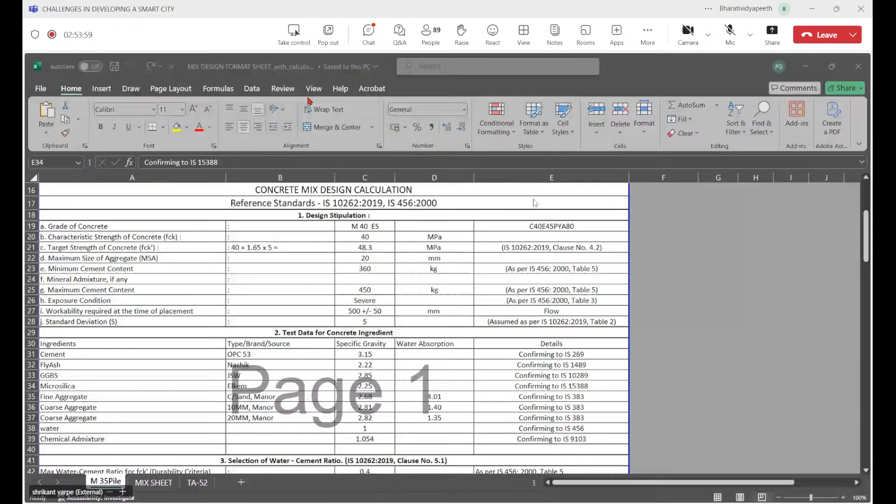As I mentioned earlier, previously we only used to fill the things mentioned in our mix design - what are the values and where we have got them from. But now they have mentioned that for each and every particular thing you have to mention why it is so.

Like if you see row number 50, there's a maximum water content for a nominal maximum aggregate size of 20 mm. It is 186, which has been in the table. If I show you, there was a table.

This was a table in our IS code for maximum aggregate size. If it is M10, 10 mm, the water content should be 208. For 20, it is 186, and for 40 it is 165.

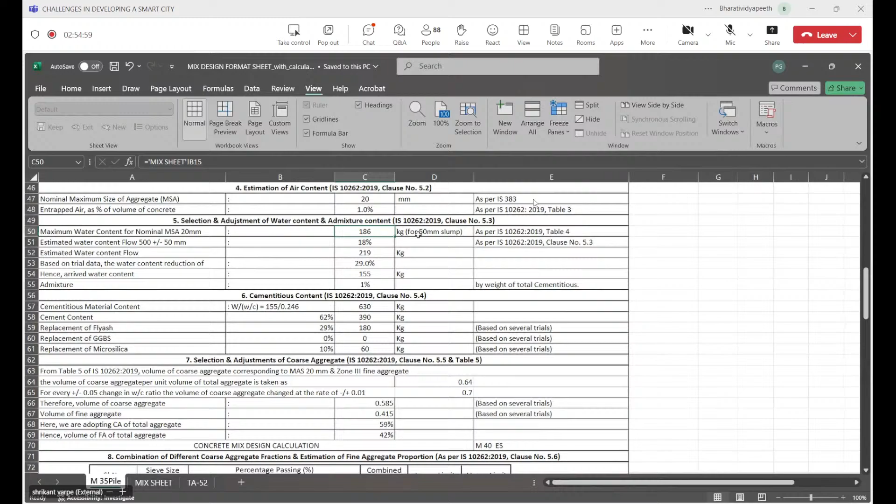This has to be mentioned over here - how we received 186, and it is for 50 mm. So we are providing this sheet, this mix design sheet, complete with a graph, a combined graph, and how the calculation has been arrived at.

Earlier, we were not used to showing this. We were just giving the values, but now it has been mentioned that this value should be shown if it is required by the contractor or by the purchaser.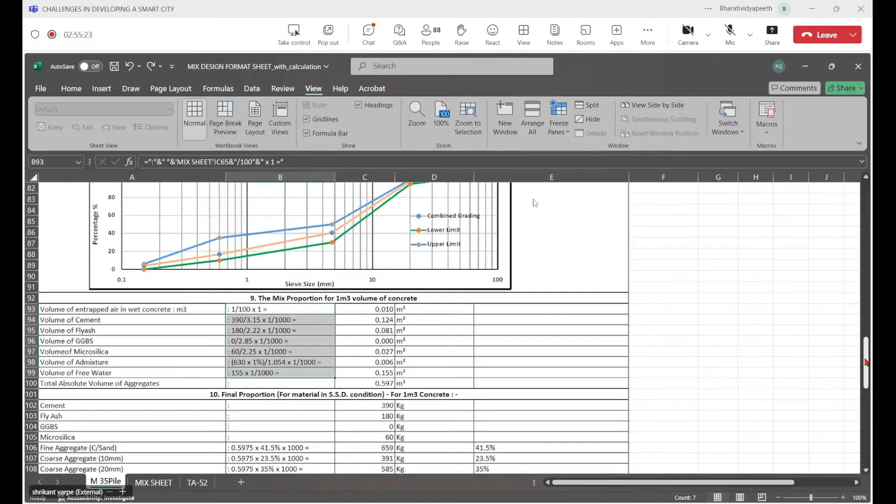So actually, this sheet I have been designing. This is an auto sheet which is generated with respect to what grade you want. If you want a grade from M40 to M95, I have designed it, along with different types of concrete.

That is, if we want early strength concrete, self-compacting concrete, dry lean concrete, Mivan, pile or PQC concrete - accordingly, I have designed this sheet.

As I have mentioned, you have to show all these graphs, this combined graph also, and you have to mention how the values are arrived at. Then all these details should be mentioned on paper before giving it to them.

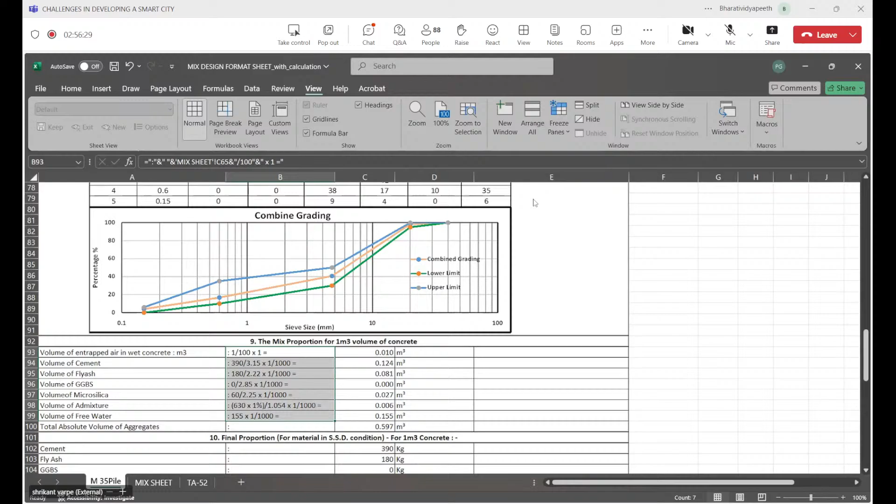This was regarding grade of mix design and how we have to mention it. The specification or the clause with respect to the material we are going to use - that is, the material according to which IS standard it conforms to.

And that automatically starts the batch sheet. So this was regarding, as I mentioned earlier, what details we have to mention for our mix design over here.

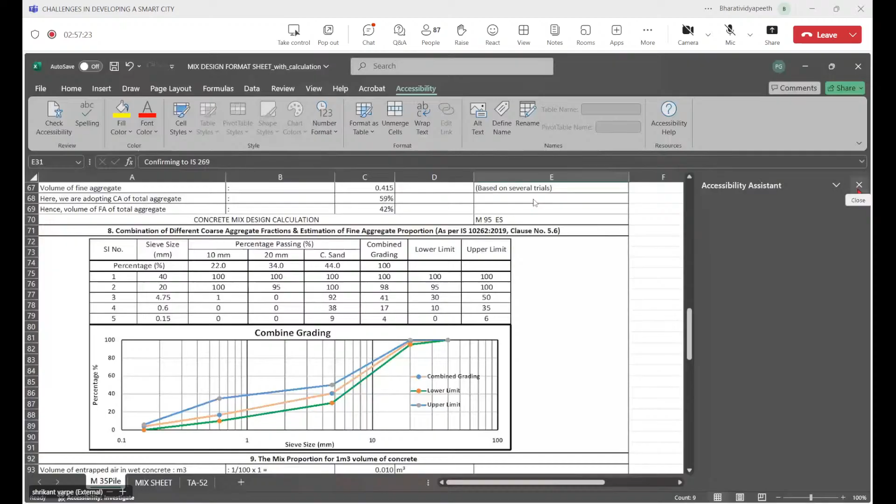I will show you one more which I have not actually explained - that is pervious concrete.

As we are going for a smart city, there is a requirement for pervious concrete as well. So these are the designs which we are following through our ACI standard, that is 522R.

522R. We are going through this specification so that we can have a mix design for our pervious concrete. As you can see over here, it's mentioned what are the limitations and what are the circumstances where we have to use our mixed aggregate to cement ratio or our cementitious material.

According to the ACI standard, it is mentioned that the cementitious content should not be less than 270 kg. It should range from 270 to 415 kg, and the aggregate should be around 1190 to 1480. The aggregate I am mentioning is coarse aggregate.

Water to cementitious material ratio is mentioned as not less than 0.27 and not more than 0.34. Aggregate to cement ratio should be 4 or 4.5 is to 1 ratio.

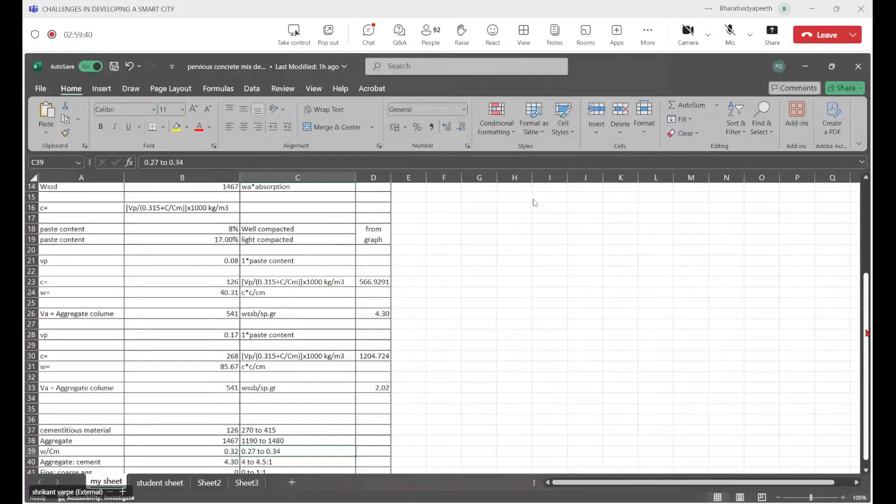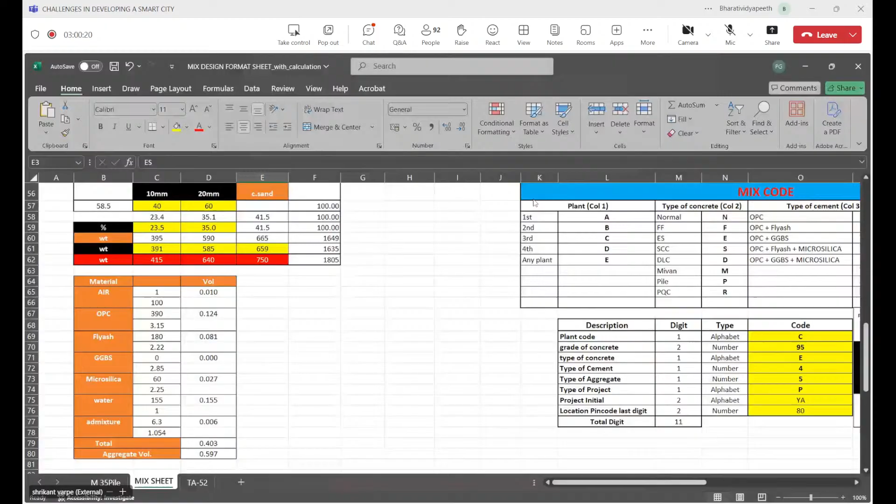As I was mentioning, the steps involved in our mix design, I will go through it. First we have to mention what grade of concrete we are going for, as per the purchaser's requirement. Suppose we are going for M95 grade of concrete for early strength, and 10 mm maximum aggregate size for a severe condition, with a flow ratio of around 600 to 650.

Now all these tables have been mentioned over here. You can see this is the graph, and according to the grade of concrete, the standard deviation will be calculated automatically, along with the target strength.

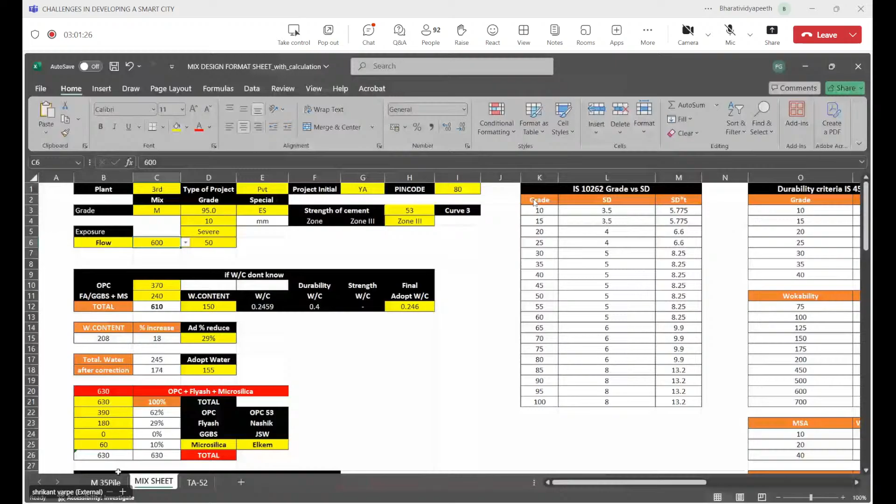As we mentioned, there's a change in our concrete grade, and there's a 1.65 mentioned. A lot of people consider 1.65 for standard deviation. Just to understand why: it is said that if the failure ratio of our compressive strength is 1 in 20, that is a ratio of 5%. That's why we consider mostly 95% as a positive result and 5% as a failure. In that circumstance, we consider 1.65 as the standard deviation.

This will change if we consider more or less failure. Suppose if we consider 1 in 100, that is only 1% failure in concrete, then the value will change to 2.88.

Now understand this 1.65 again, I will explain. The 1.65 is for a failure ratio of concrete of 5%, that is 1 in 20, that's why it is 1.65. If we change this acceptable failure ratio to only 1%, the value will rise to 2.88. This is as per the standard deviation, or we can say the bell curve, which is designed during finding out the acceptable failure percentage. The bell curve is designed, and then we can go for 1.65 for a 1 in 20 ratio.

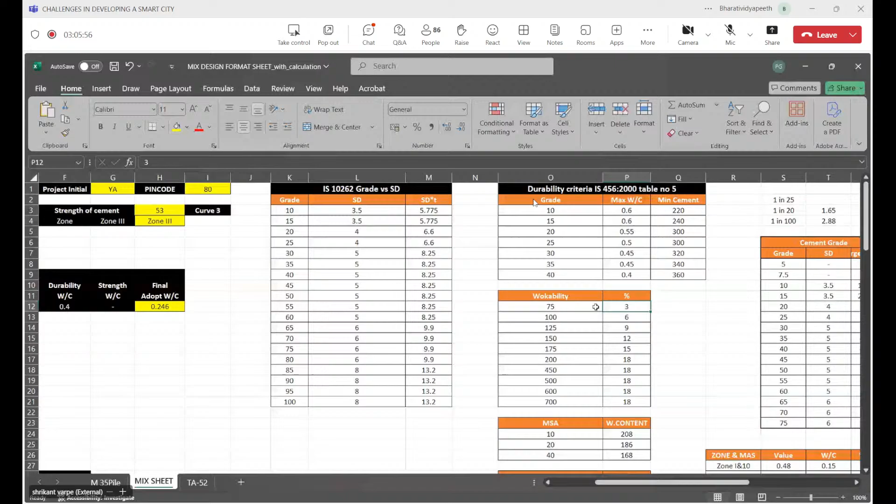So finally, to conclude, we are having a lot of types of concrete, where mix design is the most important part, because basic changes in the properties will ultimately result in the final amount or final specification of concrete. Thus, the basics should be understood first: what materials we are going for, what kind of materials, what limitations are involved in mix design, what are the maximum or minimum limits of our materials specified by various IS codes or standards. That is the most important part.

So this concrete type is from self-healing concrete, for pervious concrete. As I have mentioned, I have gone through the self-healing concrete, as I can show you, but I'm actually having some issues regarding the Excel sheet. So a lot of concrete mixed design can be shown.

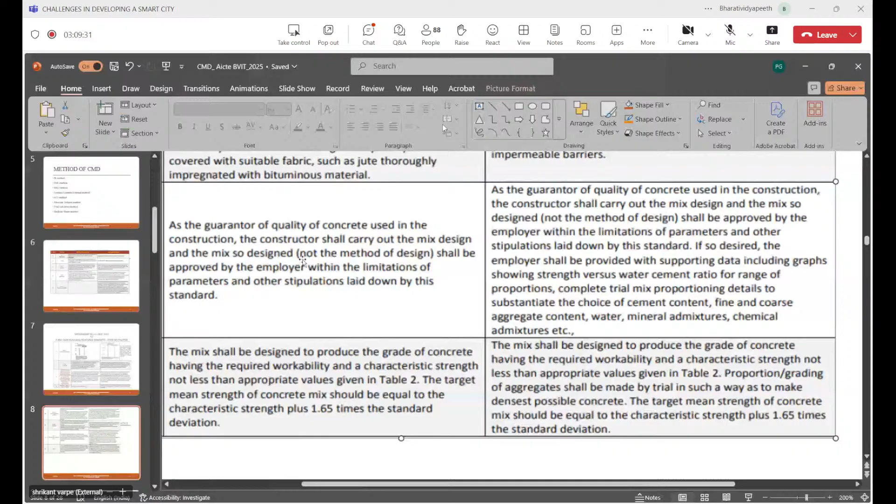So these are the questions, these are the things which I think are most important before going for a mix design, which are mostly neglected. Have all this information and design according to it, and we will have a safe and very good quality of concrete. So thank you all. Any questions, I would like to answer them.

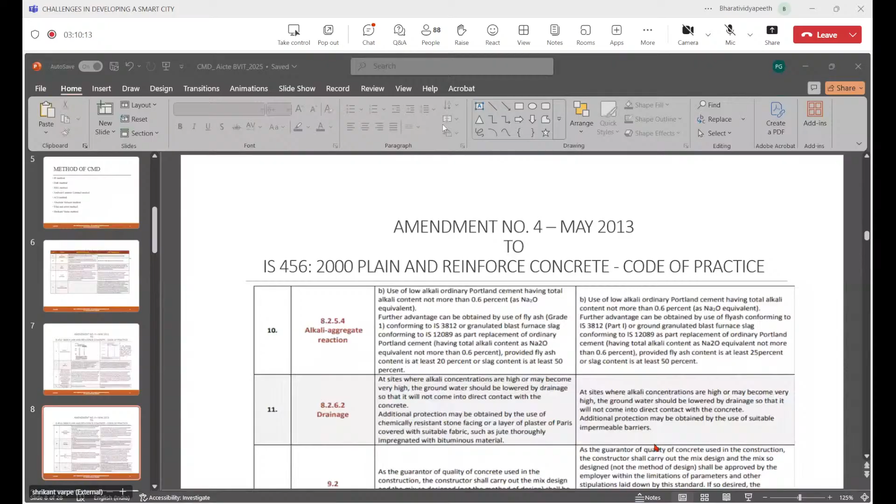Hello, sir. Hello. Hello. Yeah.

Now, when we take that characteristic compressive strength plus risk factor into standard deviation, this new code of 2019 says that either you take that, or FCK plus X. But whenever we calculate X, it always works out to be less, and we always have to stick to that 1.65 standard deviation only. So why is that X brought in then? Why don't they go for X in that case?

Yeah, actually, you can go through it. If we are going for an X value, there is a formula given in the IS code, and you can use that X value if you are 100% sure about the values which you are getting.